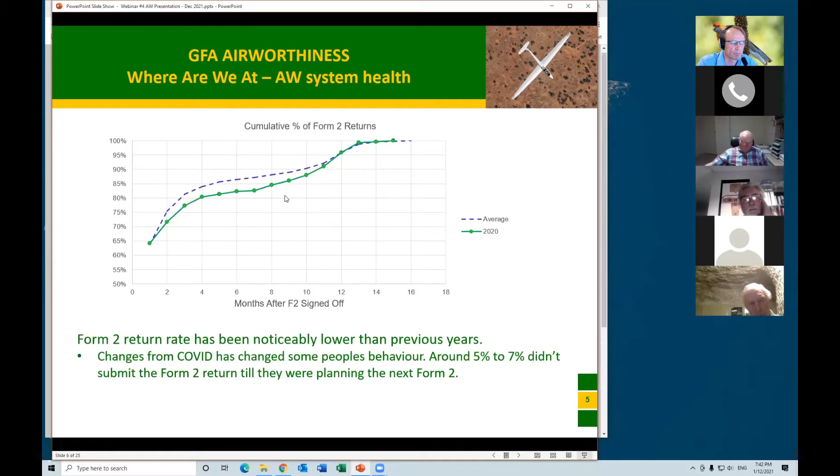So what have we been doing for the last 6 months? We were planning airworthiness courses for both the women's and the juniors. That's on hold at the moment. We were successful in completing the theory side of things with the juniors, delivered via webinar.

We were planning on having the practical courses at Camden, which very promptly caused the New South Wales government to lock down the state and the city, which has really been a major pain in the proverbial. We were planning on delivering the Women's Airworthiness course in a similar manner.

That's currently on hold. My funding for those courses runs out at the end of April. I'm looking at getting the women's course back up and running in that March-April timeframe. The juniors are trying to align the practical course with university and high school holidays, and that looks like it's going to be pushed back into that June timeframe of next year.

Lifepo4 Batteries, as I said 6 months ago, we were looking at adopting a policy similar to what's done in Europe with the CS-STAN SC034b. We have purchased the battery standards.

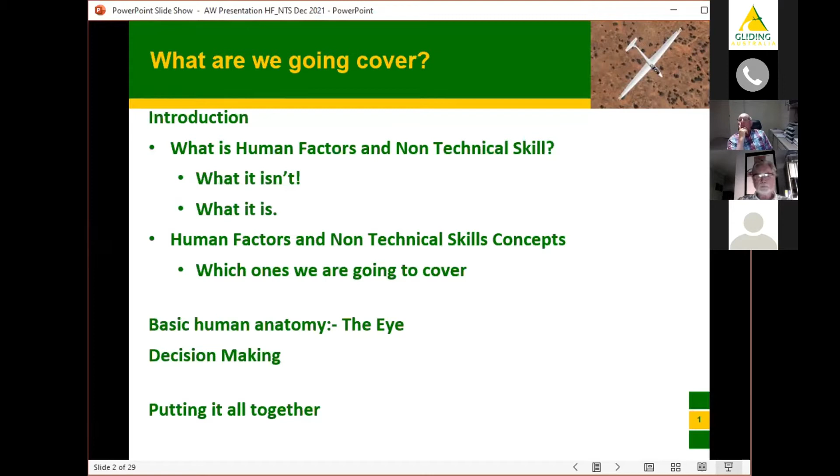So what is human factors and non-technical skills? Well, first of all, it's not an excuse. I have heard it said, 'oh, I made the mistake because of my human limitations,' or that sort of thing.

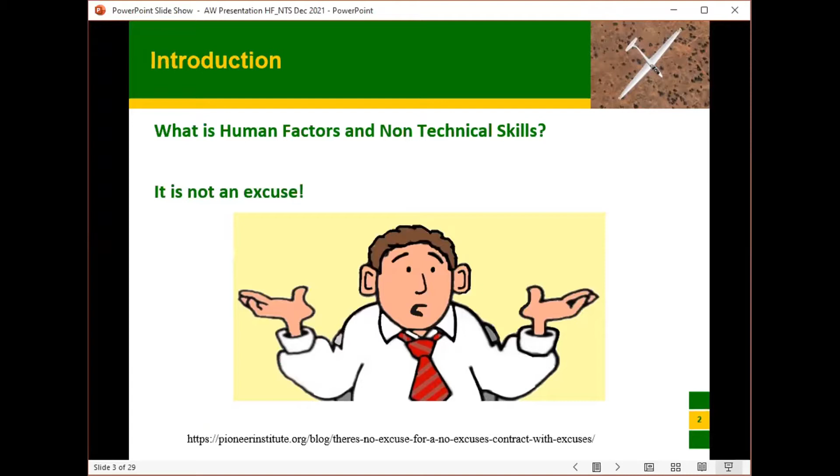Well, by learning about our limitations as people - our abilities and that sort of stuff - should then lead us to managing those and actually not making the mistakes in the first place. So it's not an excuse to make mistakes. It explains why we do make mistakes, but it's not an excuse.

The term human factors refers to a wide range of issues that affect how people perform their tasks in work and non-work environments. The study of human factors involves applying scientific knowledge about the human body, the mind and its cognitive abilities, etc., to better understand human capabilities and limitations, so that there is the best possible fit between people and the systems in which they operate, hopefully reducing error and increasing safety in what we do. That's a quote from the CASA Human Factors for Engineers material.

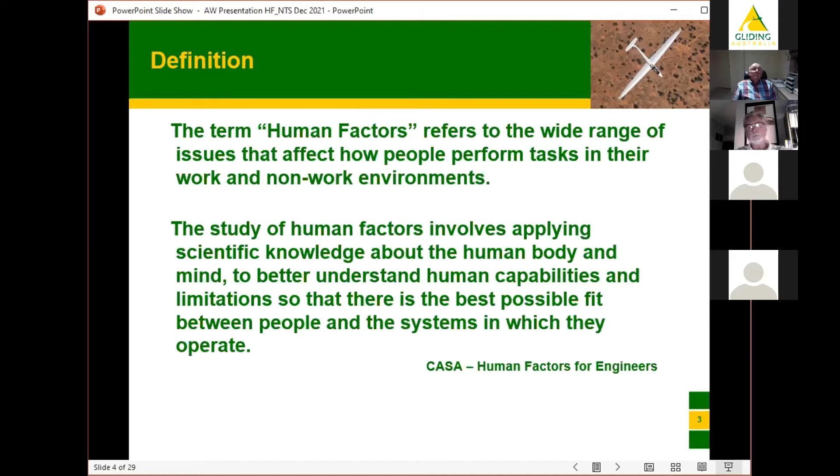My definition of human factors is: why do people do dumb things? We don't get out of bed in the morning and specifically think, 'I'm going to do something dumb today which is going to cause an issue.' We don't start a Form 2 with the idea that once it gets airborne the wing's going to fall off. So why do people do dumb things?

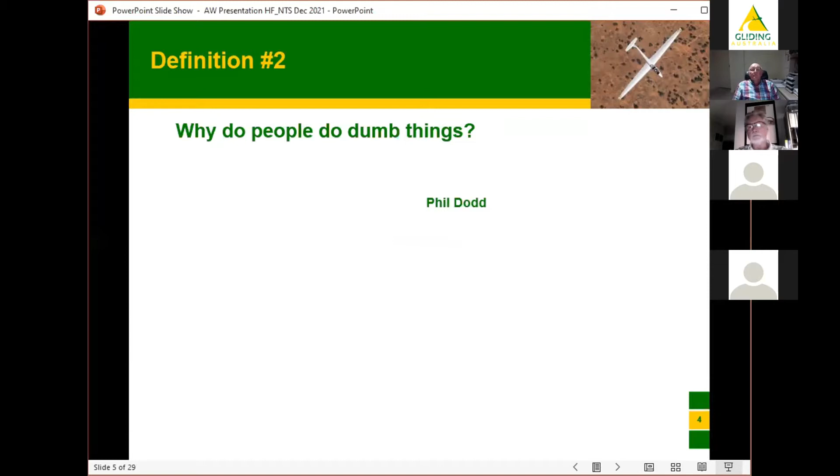That's been an interest of mine for a number of years. There are a couple of different models put out there - won't spend too much time on these, but they try to explain what human factors is. Pilots look at the SHELL model.

So we've got the liveware - that's me in the middle - and how I interact between the software, the hardware, the environment, and the other liveware that we need to deal with. Software is things like manuals, MOSPs, procedures, the culture we work in, the safety culture or lack thereof, and what norms are - what we normally do around here - and we interact with those, and they play a big part in how we operate ourselves.

The hardware that we've got to work with - the tools, the aircraft, the parts, etc. From there, the environment - the physical environment, your workshops, your lighting, the time of day - but also things like financial environments, financial constraints, and the overall culture of the club we're working in.

And then we've also got to interact with other liveware - our helpers when we do Form 2s, etc. We've sometimes got a helper, other members, the committee, co-owners of gliders, etc., and the odd visitor that comes through.

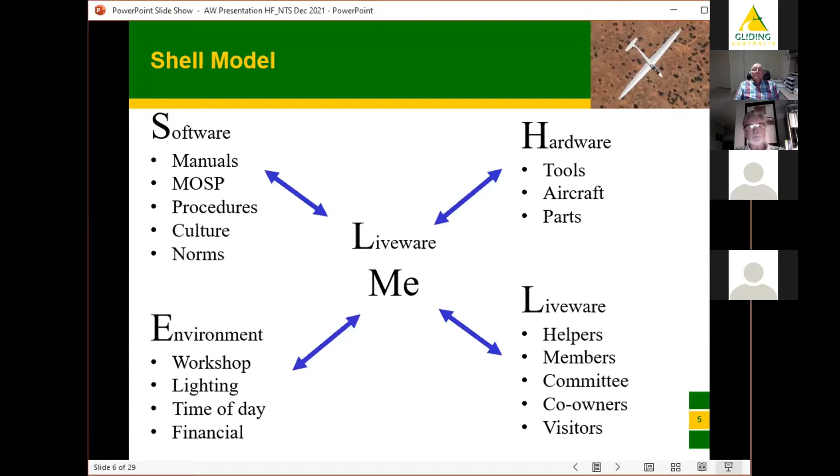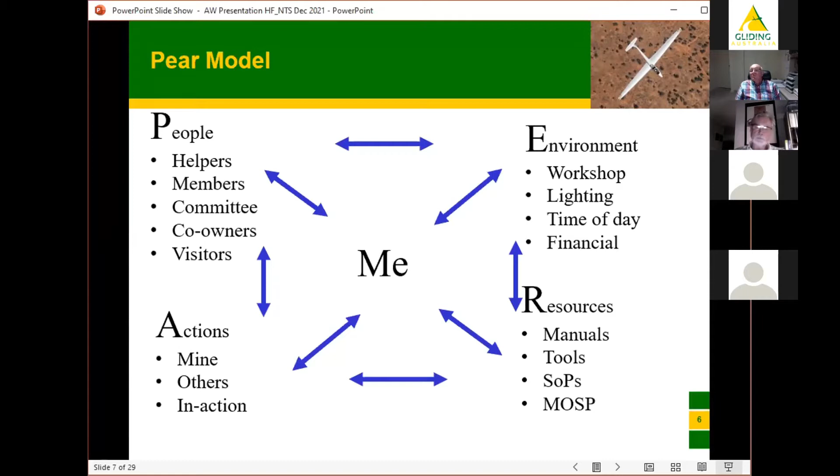From an engineering or airworthiness perspective, they also refer to the PEAR model, which is very similar, with a lot of similarities. The thing I like about this one is in the bottom left-hand corner we've got actions - my actions, the actions of others, but also inactions to be taken into account. I tend to relate to both of these, as a pilot and as an annual inspector, and they overall come together to explain what human factors are.

Some of the concepts, if you do a full human factors course from an engineering perspective, would look at error management, human performance and its limitations, decision making, fatigue, stress, alcohol and other drugs, communication, teamwork, leadership, professionalism, and how human factors fit within an overall organisational cultural sense. Those are a lot of the concepts that would be covered in a normal human factors workshop.

Tonight I'd want to look into and have a look at the top 3 in particular. In relation to human performance and its limitations, really drilling down into the eye and its limitations, but also having a look at decision making and stress, and some of the things that lead us to making decisions which, in hindsight, were probably not the best decisions to make.

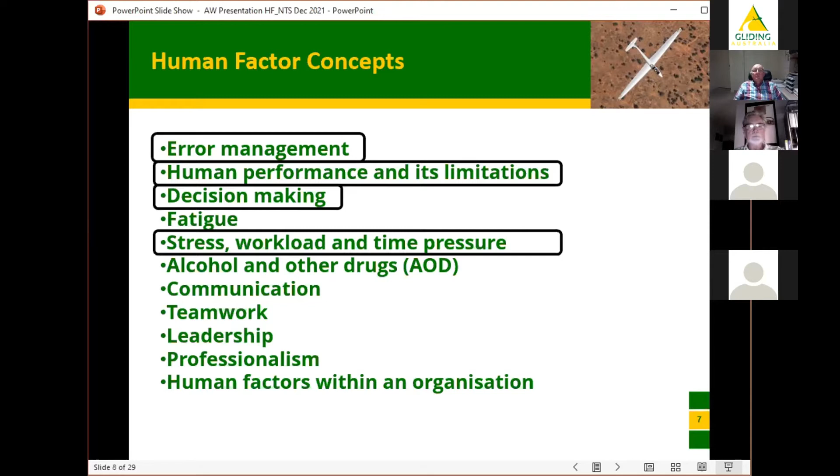So first of all, we'll have a look at the eye, and as you can see, it has many parts. This is not going to be a biology lesson, but just a couple of important things to note - the shape of the eye actually affects our focus.

Light coming in through the lens is focused on the back of the eye. Now if the shape of the eye changes, the focal point of the image still doesn't change. So if the eye elongates out or shrinks back in, then the focus becomes difficult at certain points. And the shape of the eye does change with age.

Having a look even at the videos of the participants we've got here tonight, I can see many of us are wearing glasses. That's a result of our eyes changing, and our lenses deteriorate over time. That too can also affect our vision. We can get diseases of the eyes and cataracts, and that sort of thing can all affect our acuity.

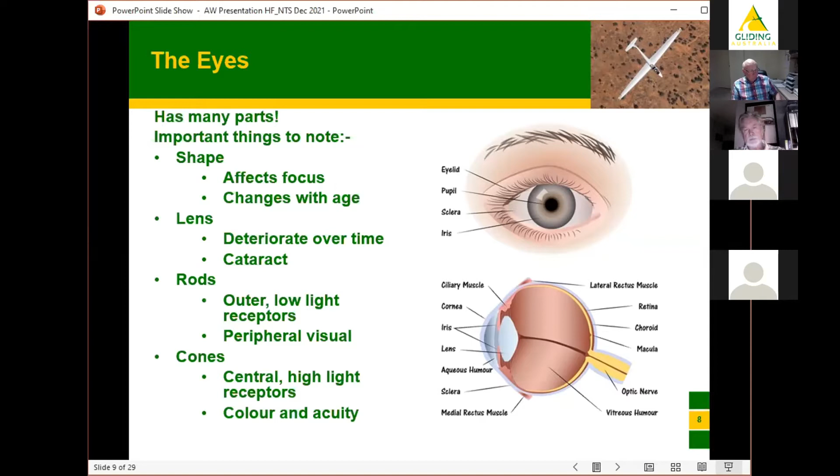I've got a blue water bottle with a grey top over to my right on my desk here, and if I look at the camera and then with my peripheral vision look at that, I can see that's 2 different colours, but I can't really distinguish much between the 2 colours. But if I look directly at it, it's definitely a blue colour in there. So the central part, that's our high light intensity receptors, and that's where we get our colour and our acuity from. We'll have a look shortly at what problems that will actually cause us when we're doing an inspection of an aircraft.

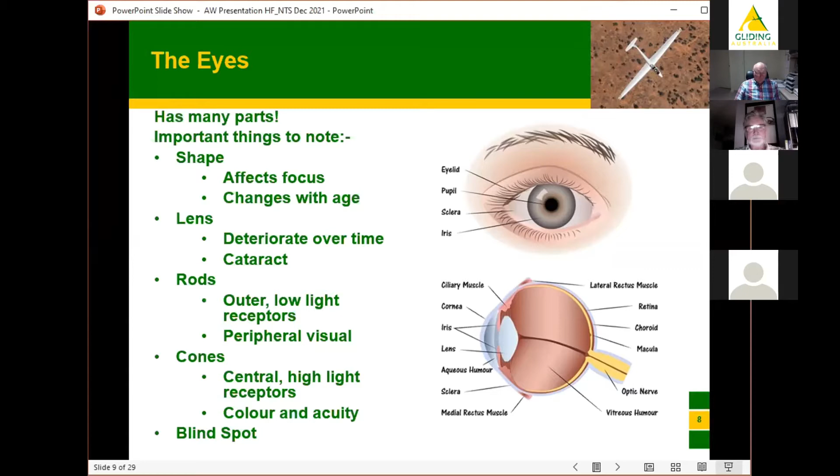The other thing is we've got a blind spot. So each eye, as you can see on the bottom diagram on the right-hand side, where the optic nerve comes in, there are no rods or cones. So any image falling on that little spot at the optic nerve, the brain doesn't pick up. Now we generally overcome that as humans because we've got 2 eyes, and binocular vision, one eye overlaps and compensates for the other. But if we're looking at something in fine detail with only one eye because of its position, the blind spot comes into being.

So a little bit of an exercise, because we've all got our computers and that sort of stuff in front of us.

On the screen there's a plus sign on one side and a circle on the other. If you were to cover your left eye and just focus with your right eye on the plus sign, and then slowly move your head towards the screen, in your peripheral vision, the circle would disappear.

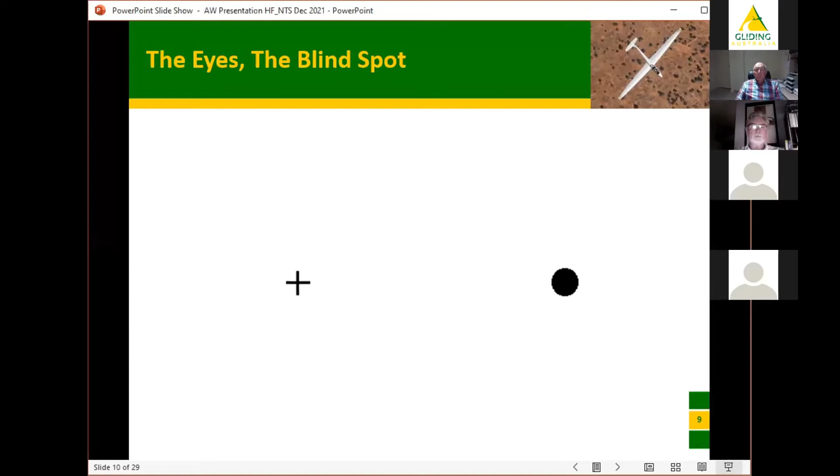So give that a go now while I've got it on the screen. That's just because the peripheral vision, that image going into the eye, hits the place in the eye where the optic nerve is, and it just disappears. Move your head in further, it readjusts, and we can pick it up. Move your head back, and we can pick it up again. But there's a distance from the screen where you'll lose one or the other.

We're also, our eyes are designed, with our binocular vision etc., to take into account perspective.

What can we see here? On first look, most people see a bunch of lemmings going up the staircase, jumping off, hitting the ground, and then running.

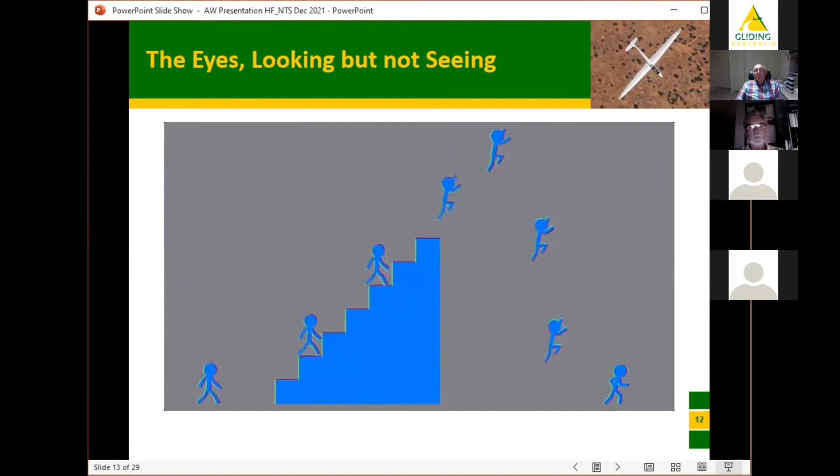We'll move on and just have a look at some decisions, and we'll pick up on the eyesight again as we look at a couple of examples, putting this all together at the end.

Decisions - how do we make our decisions? Well, if you study the decision-making process, they'll generally say 4 to 7 steps are involved in any one decision-making process. First, we've got to identify that a decision needs to be made - is this component airworthy? We gather the information, take measurements on that component, and refer to the maintenance manuals for limitations and wear.

Once we've worked out that it does need to be replaced, we need to identify alternatives. Can we actually get it fixed? Can we take it to a machinist? Do we really need to buy a new component? We weigh up the evidence - normally with us and airworthiness, money comes into the big equation. What's going to be the cheapest way to fix the component so we can get the aircraft airworthy again? Then we choose one of those alternatives, take action, and review our decision.

So we've decided we're going to get the part remachined. We get it remachined, but when we get it back, we notice it didn't really get rid of the crack or whatever. So then we've got to review the decision and maybe choose one of the other alternatives, like getting a new part.

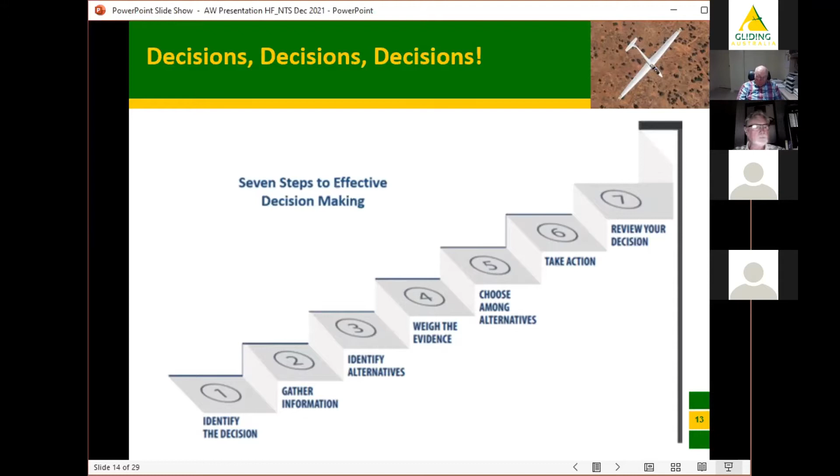Just recently in some training I've done, I've come across what they call the OODA loop, also called the Boyd Cycle, coined by Colonel John Boyd of the United States Air Force. He was a fighter pilot in the Korean War, and his studies showed that the pilot with the quickest OODA loop got to survive the dogfight. So the quicker you can go through the observe, orientate, decide, and act decision cycle, the more likely you were to survive in a dogfight.

The idea is you observe where the enemy is, orientate to your speed and position, decide what to do, then act. Now, your enemy is doing exactly the same thing. So the guy who gets to act first ends up winning, because if he turns left, the opponent who's still at the decide moment has to re-go back, and their OODA loop is reset.

So they go back to observe, orientate, decide. Oh, he's now going to the right, I'll go that way. But we're half a cycle ahead of him, so we go back the other way, and that puts them out. So those that can go through the OODA loop the quickest win.

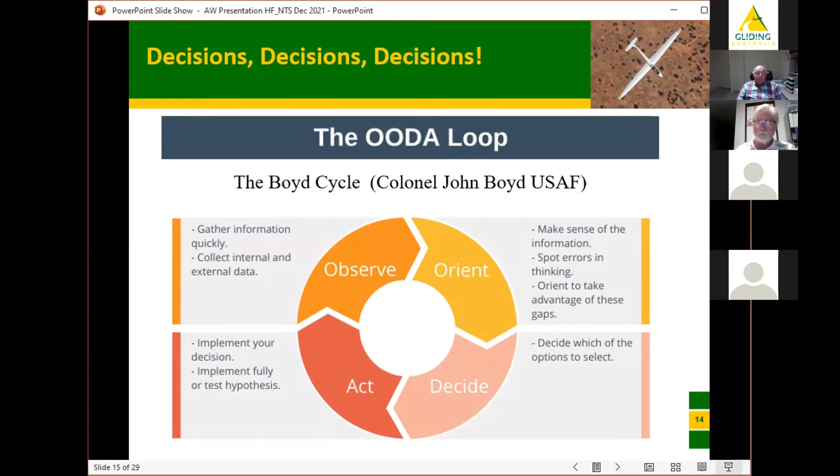But on the slower person's side, any distraction mucks up their OODA loop and their decision-making process. And that can actually happen with us in our own decision-making. There are things that can impair our decision-making.

Complacency, repetition of actions - it's always worked, so it will always work. So, oh yeah, I won't bother replacing that because it's done 3 or 4 years of good service, we'll get an extra year out of it.

The manual was written by engineers, not by people who have to actually work on the glider. What would they know? The engineers have got a theoretical view on how to fix something, but not a practical view. So there's that particular sort of thought process.

Or, just get a bigger hammer. You know, we'll try and get this pin in, and oh, it's a bit tight this time. Oh well, we'll just get a bigger hammer because that worked last time.

Also, in trying to work out the best course of action, we look without actually seeing. The brain sees what it expects to see, but is that what is really there?

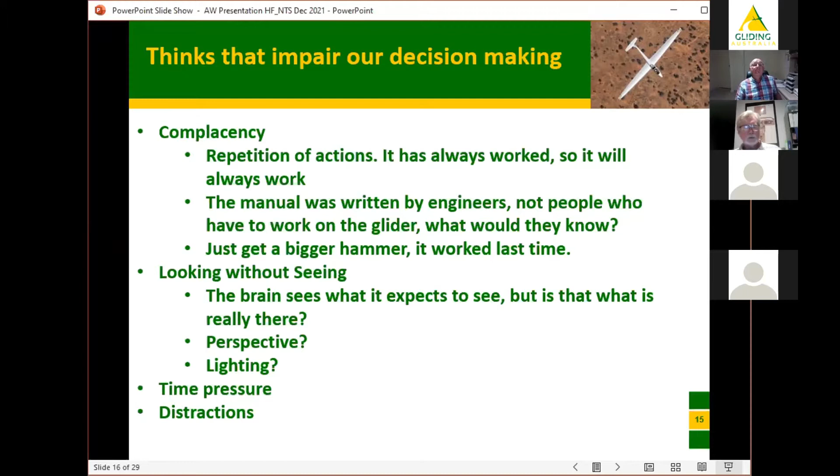So putting it all together - I don't own my own glider, but I do love flying the club's Astir. For those that have Astirs or gliders with hotelliers, as part of the DI we've got to double check those hotelliers. So here's the elevator hotellier.

So I've purposefully taken the photo in a shaded area to help my eyes adjust to the dark interior of the rudder cavity, to have a look and make sure that hotellier is actually connected. Now, because I'm looking through this directly with the center of my eye, it needs a lot of light to get detail, and from the photo we can't even see the hotellier.

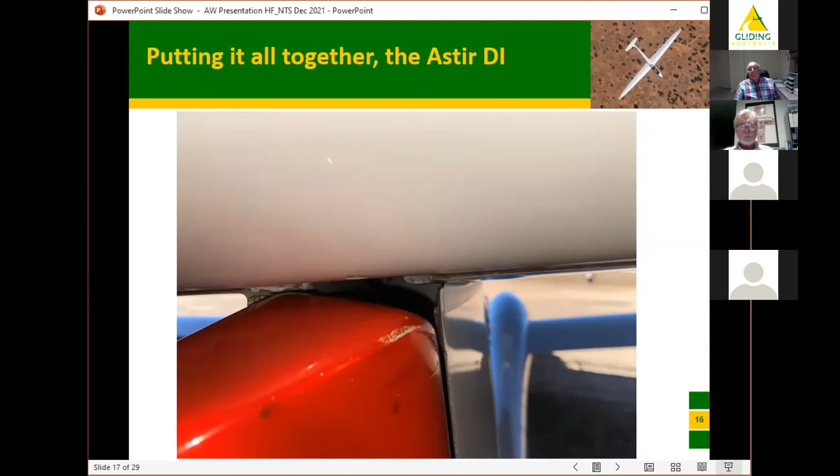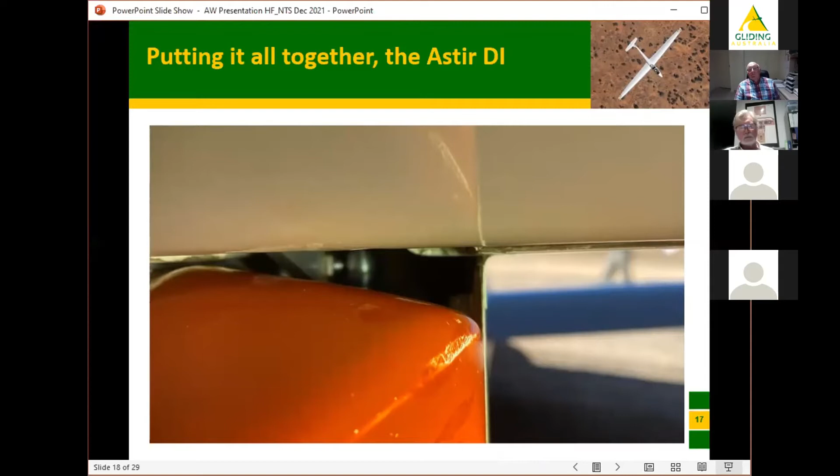So let's get ourselves a torch, and voila, there she is. So adding extra light in there helps us to see the coupling on the inside.

Again, with the Astir, we're looking at hoteliers. That's the cover in the fuse, looking at the air brakes and the aileron hoteliers in there. This is outside, obviously the white of the fuse is making our eye, the pupil, contract to reduce the amount of light going in. But of course all the hoteliers are in a dark cavity, so again you can see them, but can you actually see the detail?

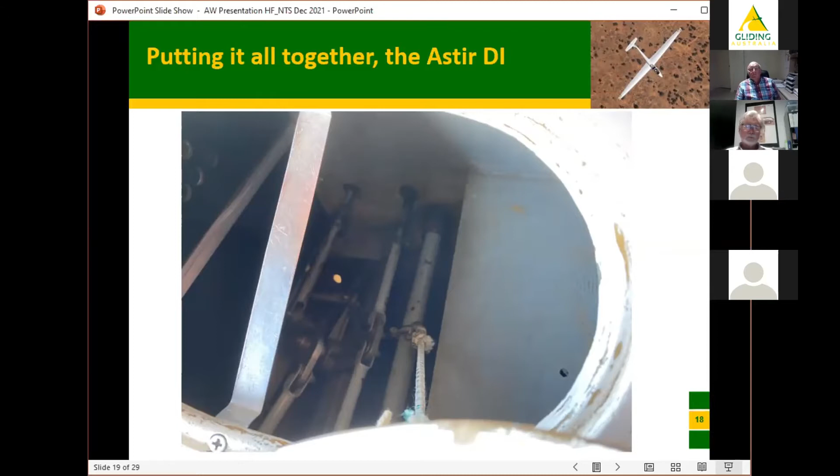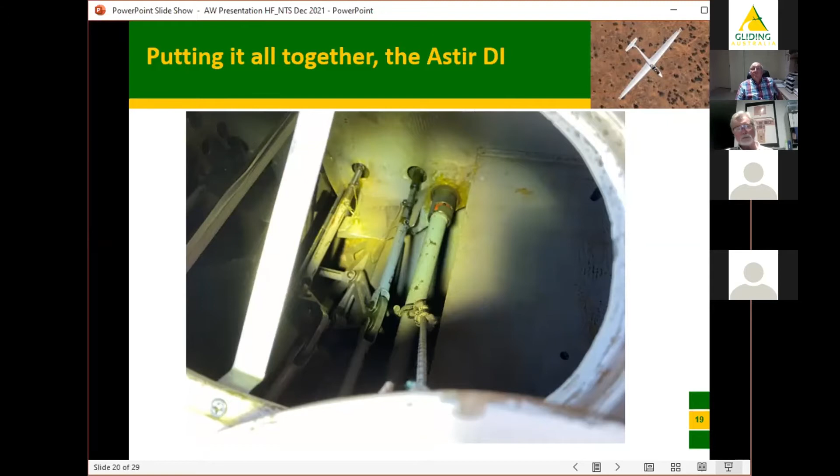So again, adding a torch in there, even though it's daylight, we can now actually see the hoteliers and the pins in there. I should have taken a photo of one of the hoteliers on the other, left-hand side, because that's where the perspective is, due to the safety pins actually underneath. So not only a torch, but sometimes it might actually be a good idea to use a mirror just to make sure that things are connected correctly.

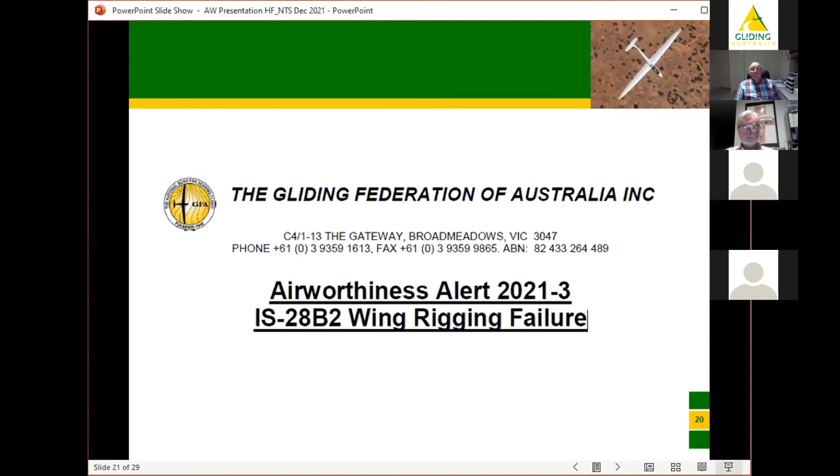We'll finish off with this Airworthiness Alert, which recently came out in relation to a wing rigging failure. So the overview: the sailplane had recently completed an annual inspection for the issue of the maintenance release.

And before we go much further, there's probably people online that know about this incident firsthand. Please, we're not going to be looking at pointing blame and fingers and that sort of stuff. What we're looking at doing is saying, okay, this incident occurred, what can we all learn out of it so that we don't make the same mistakes again? So it's all about learning from other people's experiences.

So it's just come out of an annual inspection, and it was performing a post-maintenance evaluation flight. The glider was on aero tow, flying just above the ground, when a loud cracking noise was heard. The flight was terminated immediately, and a landing straight ahead was successfully carried out.

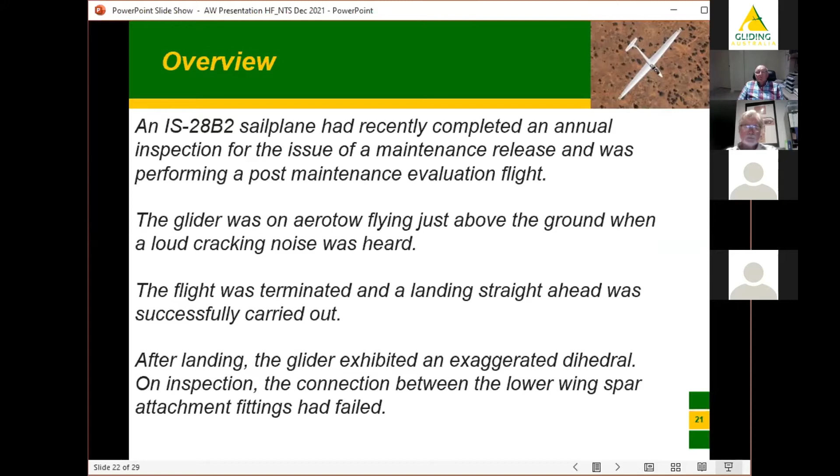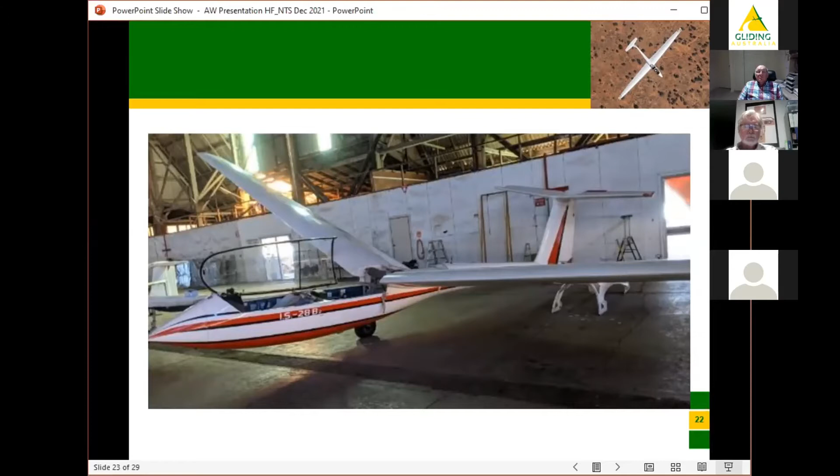After landing, the glider exhibited an exaggerated dihedral, especially on the right-hand wing. On inspection, the connection between the lower wing spar attachment fittings had failed. They put the glider back together again in the hangar, and they were able to recreate the connection. Yeah, the right-hand wing certainly doesn't look like where it's supposed to be.

On inspection, it was suggested that during the initial rigging, the upper tapered bolt had engaged correctly, but the lower tapered bolt that holds the wing spar in place had not engaged correctly. And they did some measurements, etc., and yeah, the tapered pin was only halfway in to the receptacle.

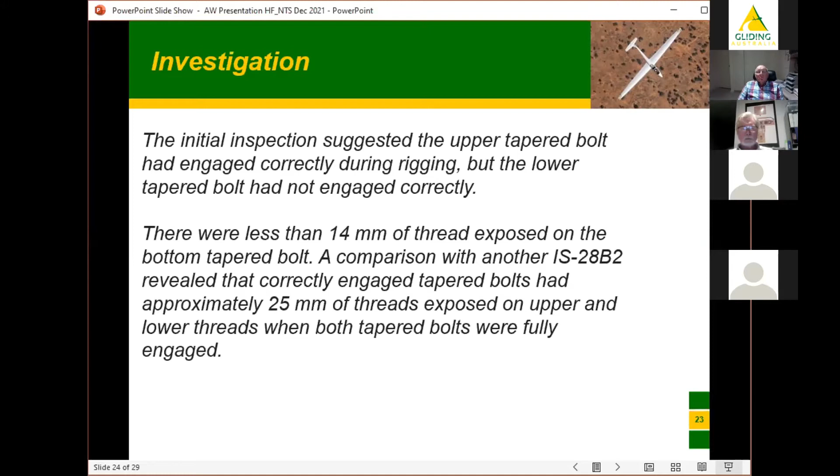So what had happened is when they were putting it in, the last little bit was quite hard, so instead of just using the standard tool, they actually used a bigger tool - let's get a bigger hammer - to sort of get it to seat correctly, but unfortunately it didn't seat correctly.

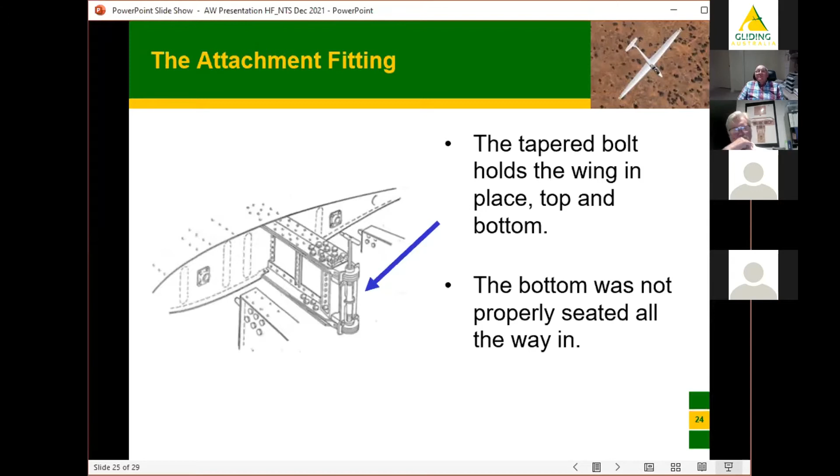A couple of recommendations from the GFA: prior to rigging, the slot guide plates for the collar should be inspected for undue wear. Prior to rigging, the tapered bolt assembly must be inspected and confirmed to be in good condition, fully functional and serviceable. So, you know, all the things that we should be doing anyway - making sure that no matter what the aircraft is, all the components etc. are actually serviceable.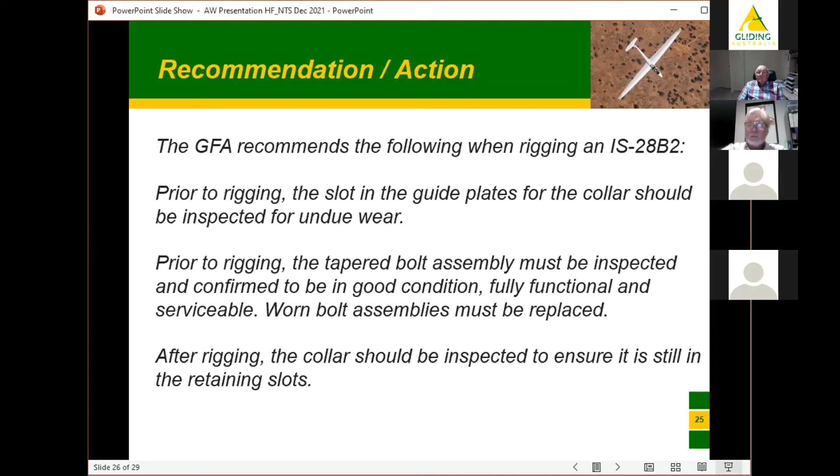So not allowing distractions and that sort of stuff to come into play, making good decisions and taking time to make good decisions. And then of course, after rigging, the collar should be inspected to ensure that it is fully in the retaining slots. I've highlighted this next bit because, as we saw with the Astir, the limitations of the eye mean we can't pick up certain things just in natural daylight. So using a torch and, if necessary, a mirror to overcome those limitations, to ensure that our wings are properly bolted on, that our controls are properly connected, etc.

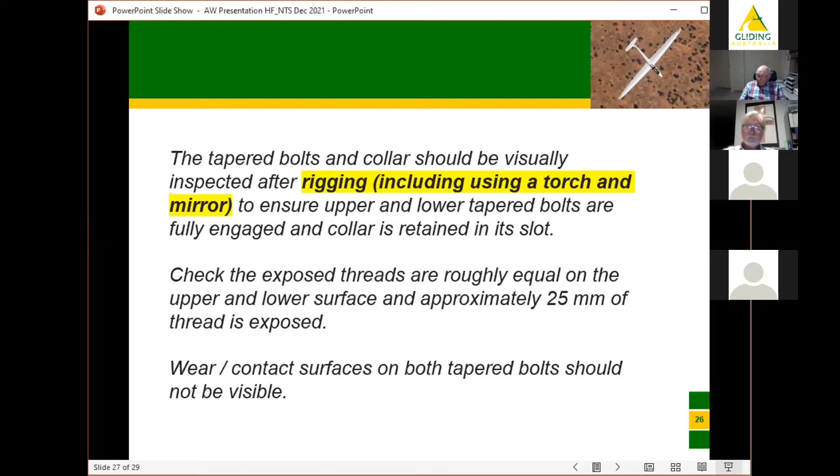So why did this happen? Look, I don't have any of the answers. These are just questions - were they rushed in putting the glider together, which negated a thorough inspection? Did they just look, or was it time pressure, or could there have been weather coming which affected their judgment? Were there other pressures involved?

What failed in the OODA loop? Was there distractions while they were putting the glider together? They put the pin in, got distracted, and forgot to do a proper double check. Complacency gets us all.

We've all done the same thing over and over again, and we expect the next time will be exactly the same. Things change, and we've really got to overcome this complacency by being diligent in what we do. It might be the 50th time we've done a daily inspection on our glider, but let's do it as if it's the first time.

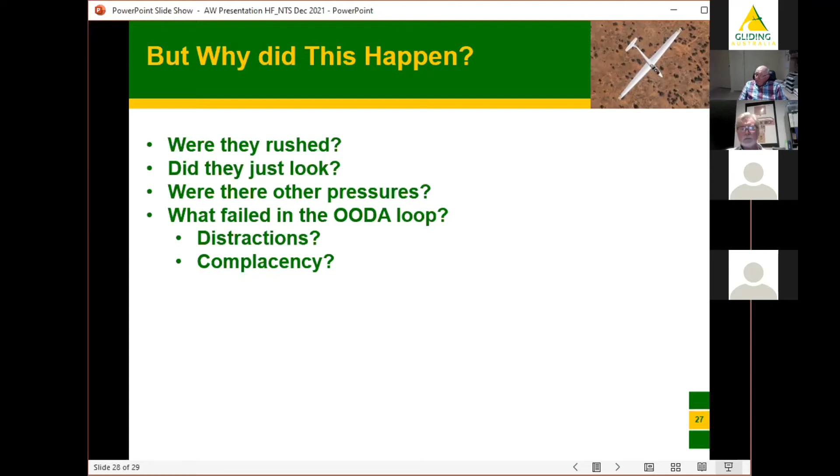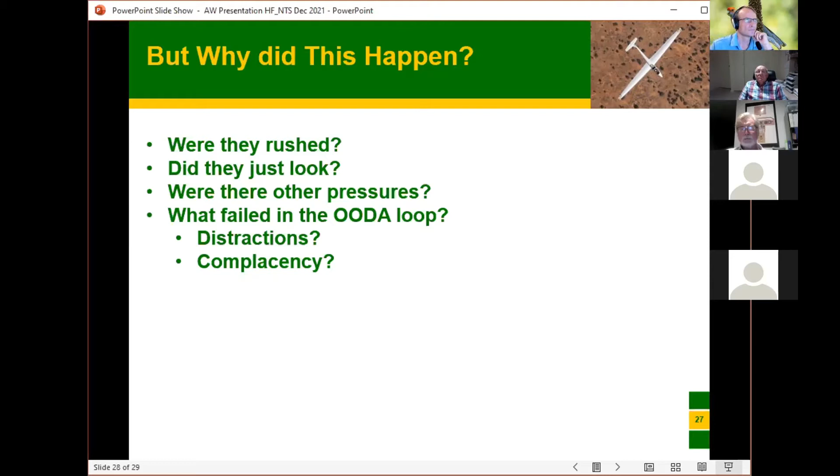We're inspecting our glider to buy it. Remember the time when, if you own your own glider, you did that initial inspection - you went over it with a fine-tooth comb. Well, do that with your daily inspection too. Because at the end of the day, the mistakes we make in aviation, a lot of the time they're not forgiving.

We had a couple of guys that made those mistakes and we had those issues, but we could all fall into that same trap. No matter what sort of gliders or aircraft we fly, we're all human, we're all fallible, we can all fall into the same trap. Now that we're aware of those things, we need to mitigate them in our own operations.

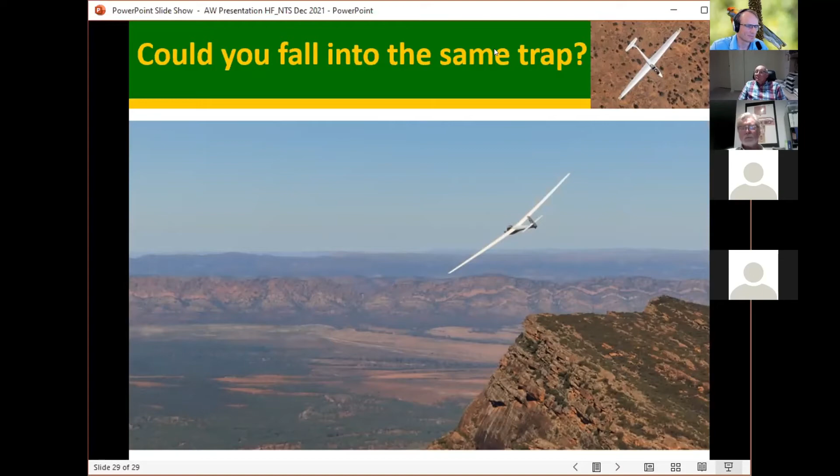Just looking through the chat to see if there's... yep. So sometimes a boroscope is the only way of actually checking. I actually went and bought one last year when doing a Form 2, because you're right - a boroscope can get in where the eyeball can't.

So yeah, cool. All right, how do I hand this back to you? You're on mute, Anthony. Right, thanks Phil. I should be able to share my screen now, and it should revert back to me. Not a problem. And I've lost my chat screen. I saw someone's chat come up. There we go - yes, IS-28 main pins do need some thought to understand. I do have a little bit more recent information than what I provided, Phil, when we put this together, so we'll cover that one again a little bit later, but I won't go into a huge amount of detail because we've already had a bit of a discussion on it.

On to recent incidents. 6 months ago, I talked about the low-profile nuts, which are now readily available in Australia. Since then, many have been found to be over-torqued, and this was due to a previous Form 2 from about 12 months ago. So it's not something to do with the nuts available in Australia, but people are torquing these up as if they're full-sized M6 nuts, using probably twice as much torque as what the bolts or nuts are actually capable of handling.

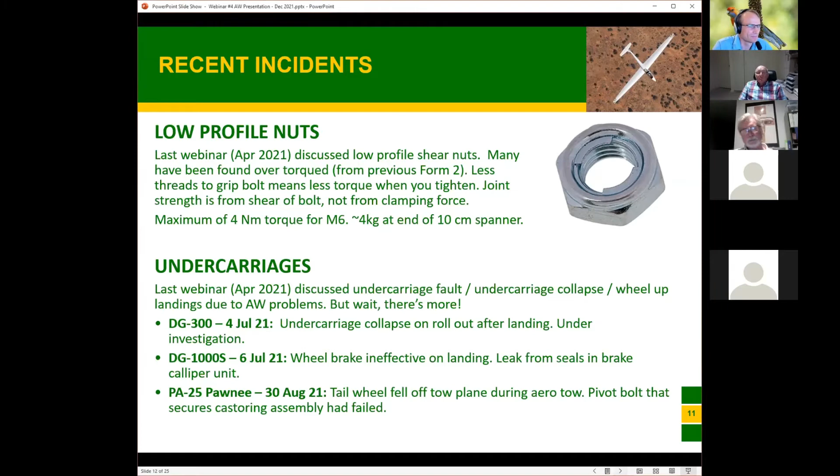Also, in the last 6 months, there has been a revision of the inspection schedules for the K6, K7 and ASK13 tailplane. This is for the end rib on the elevator. It's a known problem for glue degradation from moisture getting into the joint.

This is as a result of an accident that happened in Hungary, where the elevator parted company with the aircraft during a winch launch. It landed safely. It was noted during the daily inspection that the left-hand elevator had a different amount of deflection to the right-hand elevator, so there were signs during the DI that something was wrong between the two halves of the elevator, but it wasn't further investigated.

During the flight, the debonding of the rib allowed the elevator to move outboard, and so it came off the outboard pin. The only thing holding it on was then the trim tab actuator, which tore off. So the elevator landed on the runway. The aircraft managed a circuit and landing again.

Important to note that this has been made applicable to the Schneider-built ESKa6 aircraft as well. The K6Es are exempt. They have the all-flying tail rather than the conventional tailplane.

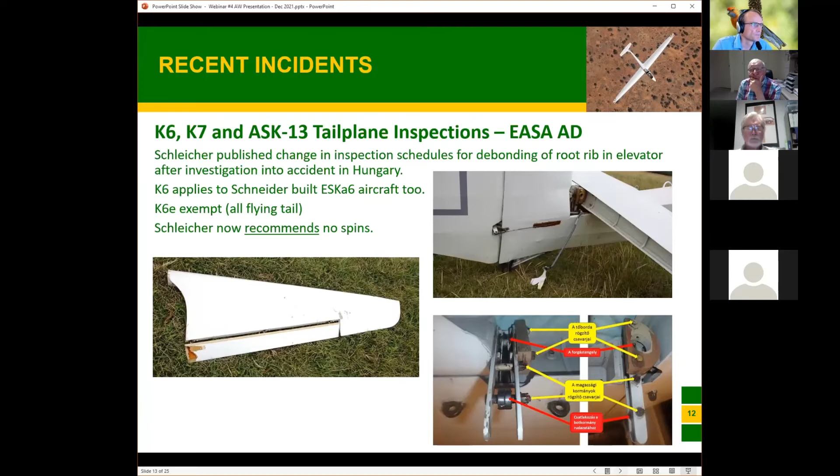We've had a lot of recent incidents that relate back to the annual inspections. These all happened very close to the annual inspections. So, DG1000 - and I'll point out there's quite a few DG1000s mentioned tonight. It's not the fault of the aeroplane, it's just that one of the operators of the aircraft is really efficient at submitting defect reports and SOR reports when something goes astray.

DG1000, 28th of August: during the first DI after the Form 2, both ASIs were found to have no pitot response. During the annual inspection, person A tested and refitted both ASIs and checked that they were connected. Afterwards, person B worked on the nose release and disconnected the pitot plumbing, and it wasn't reconnected afterwards. There was apparently time pressure to get the aircraft out of the workshop as a factor in that.

ASW20B on the 18th of September - someone's scribbled on my slide there. During evaluation flight after the annual inspection, the pilot selected flap position 4, which I think is the thermaling position - I think Drew Martini will soon correct me if I'm wrong - and found that the aileron movement was restricted.

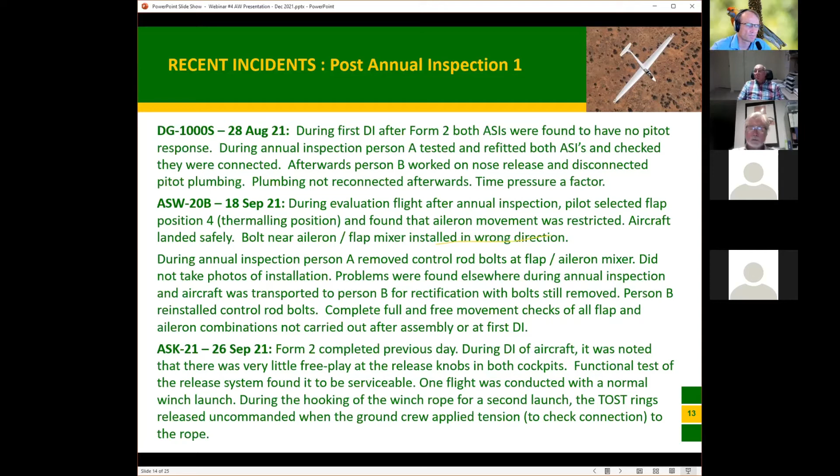Another DG1000, 26th of September. During the DI, it was noticed that the lock nut on the port inboard air brake pivot arm wasn't within safety. It had zero thread protruding.

Further investigation showed that the bolt had not been pulled up tight. The nut wasn't loose, it couldn't be either loosened or tightened by hand, but it had had at least 29 DIs since the Form 2.

You can see that previously there'd been some witness paint painted on the system. That wasn't present this time round, and there's a 1.5 mil gap protruding, slop in the bolt. Now that could potentially catch, depending on the tolerances and clearances on the airplane, on something and prevent operation of the air brakes appropriately.

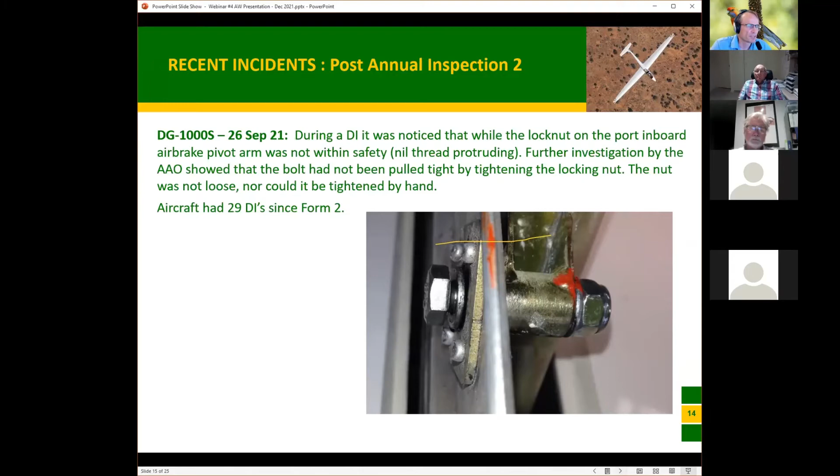That had been present for some time and hadn't been picked up on during the DIs.

This one's a bit of a story. JS1B, 3rd of November '21, so very fresh. The second flight after the annual inspection - the evaluation flight was the day before, and the aircraft was operated without ballast during that evaluation flight.

During the second flight, it was a cross-country flight. The pilot was on final glide and encountered extensive sink. The pilot decided to dump water.

Whilst on circuit for an outlanding, the pilot attempted to start the sustainer jet, but after the engine's initial spool up, it shut down with an error message. This engine had previous problems, but had been successfully ground run during the morning of that day.

On final, the rate of descent was much higher than normal, and the aircraft was undershooting the fence. I will point out that the outlanding planning and circuit planning on this was very much on the low side.

The pilot opted to veer left to land alongside the fence, so it turned to the left wing down. The left wing contacted the ground at some point during the proceeding of the landing. The pilot's unclear as to whether he was still in the air at the time or whether he just touched down or not. The aircraft rotated 180 degrees and landed in reverse.

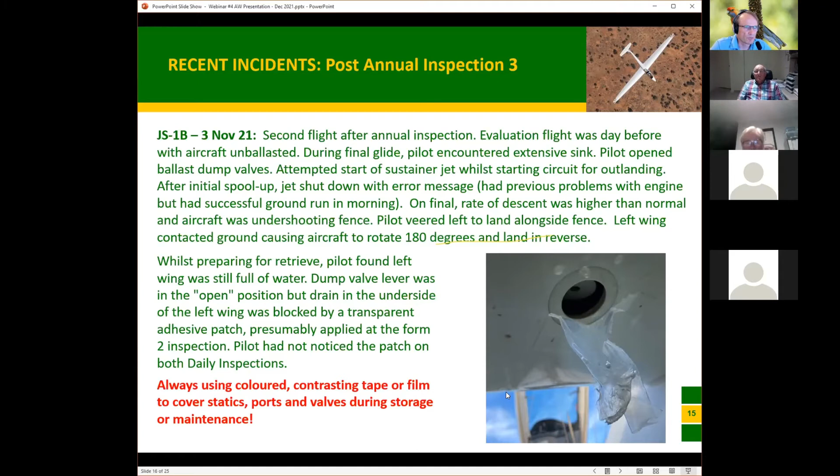I do wonder, with the extra 100 kilos still on board, just what the margins on the pilot's stall speed was during that circuit as well.

So, take-home message: the first flight or flights after the annual inspection have a much higher risk than what would be considered normal. We have seen control issues, instrument issues, system functionality issues, and of course the ever-present FOD - tools left in aircraft, odd nuts and bolts and washers and bits of lock wire floating around the system.

The first daily inspection, and of course the independent inspection, needs to be extra vigilant and very thorough when you're looking at these airplanes coming out of annual inspection.

With the ASW20, at some point all the possible permutations of flap and control deflection, and aileron deflections in particular, should be checked. And that should really apply to any aircraft with a flap aileron mixing circuit - really need to double check that there's full and free control of movement in neutral.

A Grob 109, on the 31st of July, the aircraft had been pushed partially into a hangar to get out of the wind for an engine oil change. After the oil change, the engine was turned over by hand with the ignition off to help circulate the oil through the filter, then started briefly before checking the oil levels. The pilot in command started the engine while standing outside the aircraft, with the fuselage still inside the hangar.

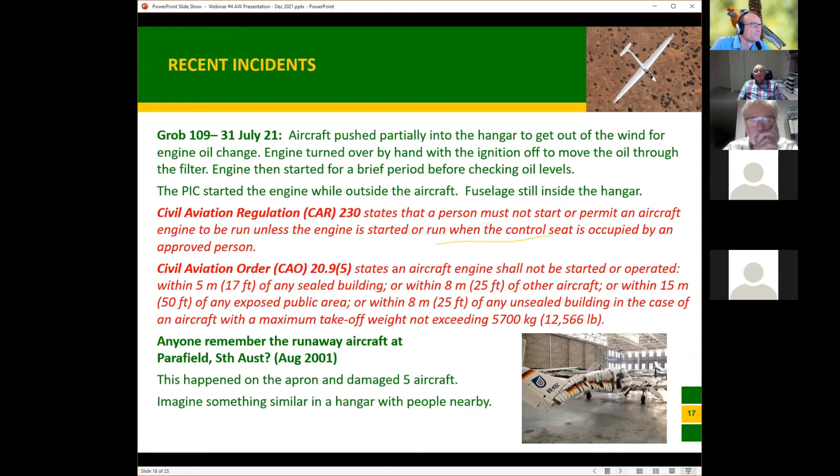An interesting one, DG 400. During the flight, the canopy was partially jettisoned. The canopy jettison knob sits on the right-hand sill of the cockpit frame, and the cockpit air vent knob is just under that on the starboard side. The pilot had a flight computer mounted on a suction cup on the canopy, which obscured the view of both.

The pilot went to open the air vent and pulled the canopy jettison knob instead. The reason I bring this up is most people install these optional extras during the Form 2 season. In this case, even though there was positive identification of controls through colour coding, the jettison knob has a different shape and feel to the air vent knob - it just couldn't easily be seen or visually identified.

It's a self-launch aeroplane, and the instrument panel is really crowded. So when you're looking at installing extra instruments or accessories, it's really important to consider the cockpit ergonomics and the safe operation of the airplane - not just that it's handy to have that widget right there.

You'll notice in the photo, this is a recreation of the event, that there's been multiple locations for where the suction cup's been applied - you can see the coffee rings on the side of the cockpit. There's one well forward and a bit above its current location, which by a rough guesstimate was probably okay - you'd likely still see the jettison knob and air vent underneath the display. But this time it's been installed further aft and lower down, blocking the view.

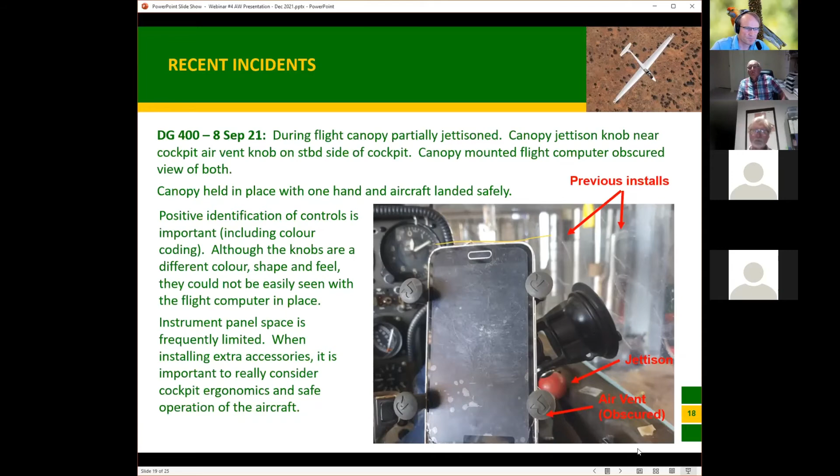A Janus B, 19th of September, during a cross-country flight I believe. Both pilots' harnesses came undone at different times during the flight, happening three times whilst thermaling. It's the FB-19 harness, like in the photo. The front pilot is a fairly mature build, and they were thermaling with a lot of backstick. I'm told the Janus B cockpit ergonomics means the seat and stick position are quite close to each other.

In both cases, the control stick was aft enough that the pilot's hand was in contact with the spring clip on the harness, and when the stick was moved to the right, it unclipped the tongue of the spring clip from the harness. The spring clip tension was fine, not deformed - the harness is otherwise quite serviceable.

It happened twice in a similar fashion in the back seat. I had quite a few conversations with the club involved. They're looking at actually ballasting the aircraft a bit more, so it's a bit more tail heavy, and I understand the front pilot is also doing something about the mature build aspect of it.

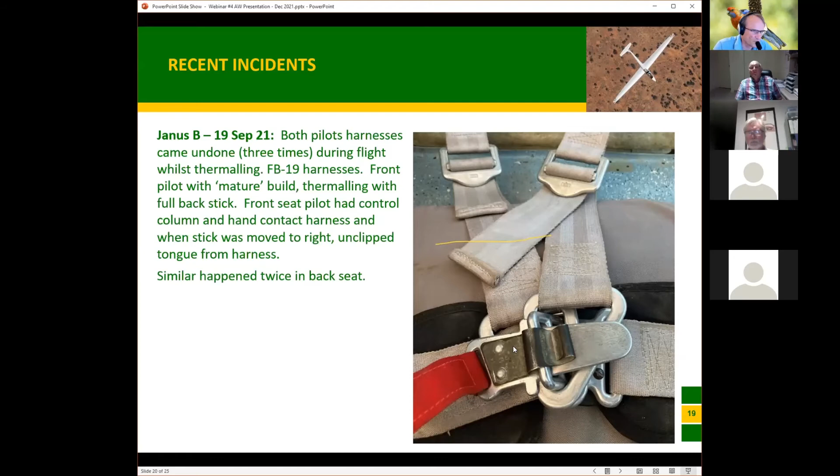I suspect it was a dry joint or something like that where the wiring joins onto the pin.

Another DG1000S, 6th November. The instructor noticed the trainee was exceeding speeds on launch, or very close to exceeding speeds on launch, by approximately 10 knots. This was unusual because the pilot had previously demonstrated very good speed control.

After launch, it was found that there was a 10-knot discrepancy between the front and rear ASIs, with the rear reading higher than the front. They couldn't find a fault with the aircraft or the aircraft pitot-static system.

They removed the ASI and confirmed it was still reading 10 knots high on the manometer. They sent it to an instrument repair shop, which found the diaphragm was contacting the support post in the instrument, so it's from manufacturer. There must have been very close tolerances during manufacture, and over time it deformed a bit further and came into contact.

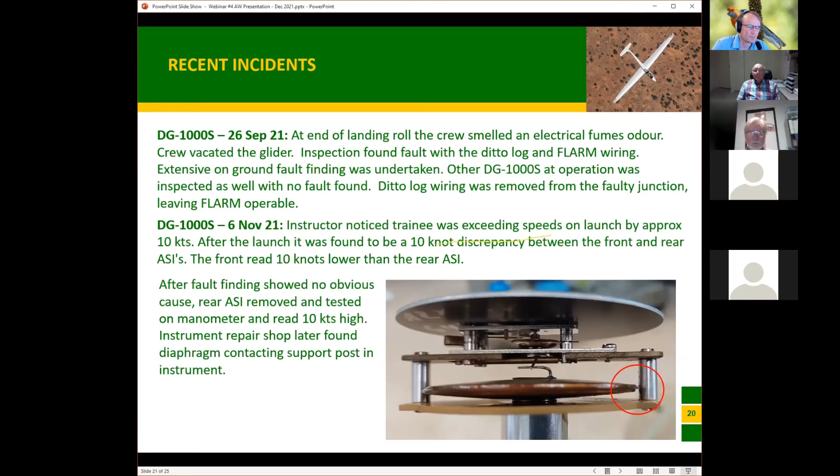I'll point out that there have been accidents in the past leading to fatalities where aircraft using these tapered cone kind of arrangements for their main pin connections haven't been rigged or connected properly. That's either caused fatigue failures because of high stress loads going through one of the fittings instead of both fittings on the plates here, or just complete failure of the joint.

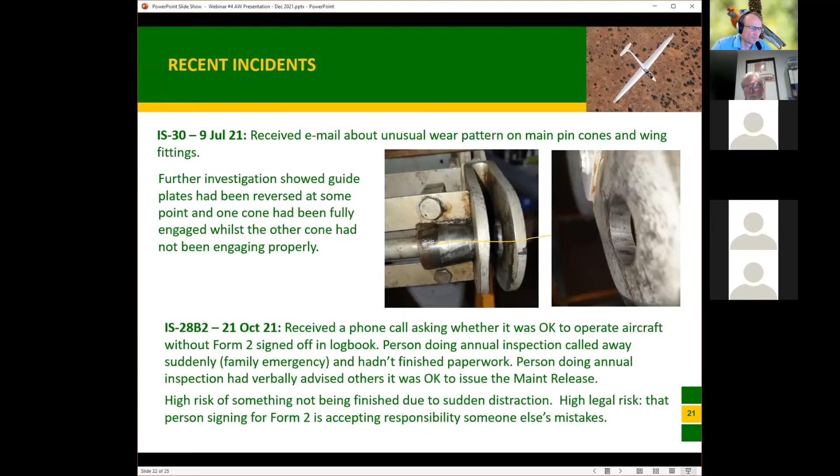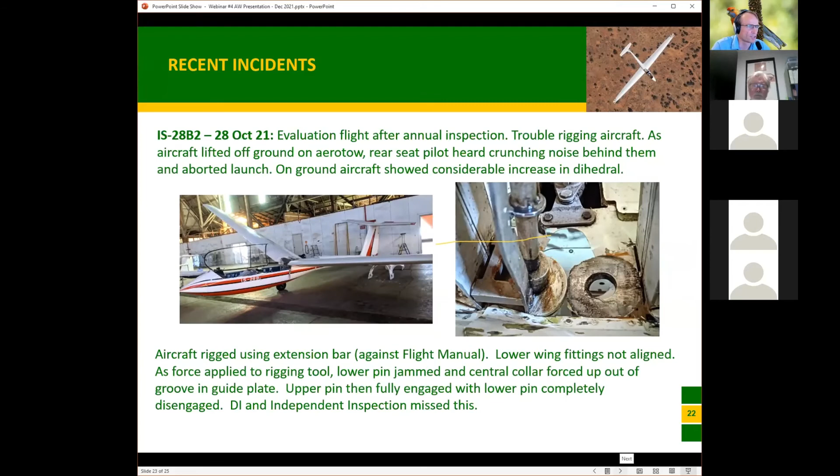So from discussions tonight, what can you change with the way you think and the way you approach airworthiness activities that you're involved with that will make a positive difference? That's the take-home thought of tonight.

I think I've asked about this before - a collection, like a wiki, for each aircraft of the sorts of problems and things that have gone wrong in the past. So if you're doing a Form 2 on a particular aircraft, you can go to that to see the sorts of problems others have had in the past, such as the IS-30 before. That's not in an AD as such at the moment, but it's things to look for, whether a plate's been reversed or whatever.

Is that some sort of a database that may be on the GFA system?

What I'm looking at doing - one is we've reinvigorated the AN process, so a lot of this stuff is going to start feeding into the AN system. There have been a number of airworthiness alerts which have now passed a couple of years of age, which we've now rolled into ANs on those aircraft. It'll be a job in hand for Dennis to start rolling in some of the defects and other incident reports we've seen into the ANs, so they will be recorded there.

I am looking at the feasibility of having an online defect report page on the web page where you can look up your model of aircraft and then get a list of defect reports that have been submitted on that type. That's in a feasibility and legal review at the moment to see just what our legal responsibilities are.